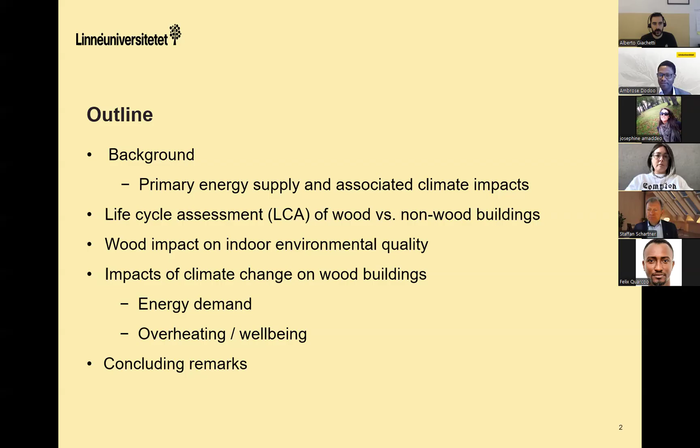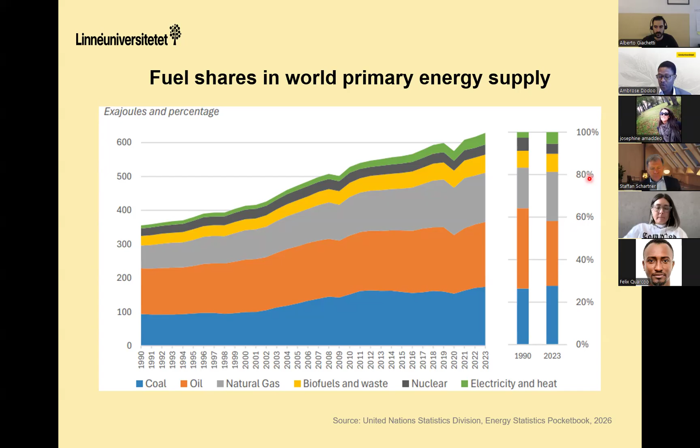But if you look at that percentage-wise, we see that still we are heavily dependent on fossil fuels. Globally, over 80% of all our primary energy supply is still coming from fossil fuels, despite all the effort we continue to make. And of course, we are making a lot of effort. So this tells us that we need to do more than what we are doing. This is because our use of fossil fuels is associated with carbon dioxide emissions. The fossil fuels are hydrocarbons. In other words, when we burn them, we get carbon emissions and we also get hydrogen coming into the atmosphere.

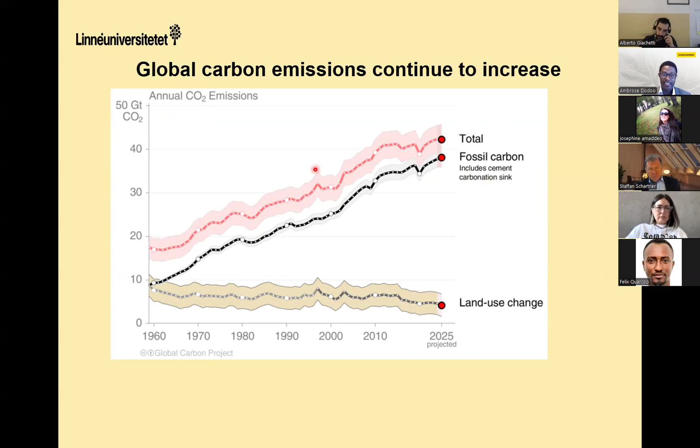And we see the evolution of the global carbon dioxide emissions over the years. And this is actually following our consumption of fossil fuel. So this is a reflection of our global energy and material system today, heavily dependent on fossil fuels. Over here, we also see the emissions coming from land use change. Of course, this is when we clear the forest or change the use of land, and then carbon is emitted. Together, we see that the emission is increasing, and we need to change the current trends.

And already we see that today, global emission has caused a temperature increase of about 1.4 degrees Celsius compared to the pre-industrial era. And if you look at the latest numbers, we saw that in the year 2025, for the first time, the temperature anomaly for a particular year was over 1.5 above the pre-industrial level. So we face a very huge challenge, especially when we have a global ambition to limit global warming to well below 2 degrees while looking at 1.5 as our target.

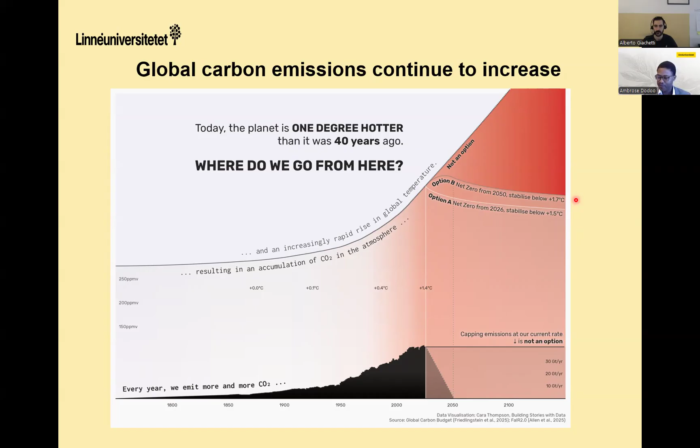So the current way we supply our energy, to power our production system, to produce our materials, needs to be rethought or needs to be changed. This demands fundamental transformation. And the IPCC 1.5 report gives a number of strategies we can implement to achieve this 1.5 if this is what we want to achieve according to the Paris Agreement.

The question is, how do we achieve this in the building sector? What are the solutions to achieve this kind of high ambitions? Of course, these are not only high ambitions, these are challenging, but this is something we must do. It's an imperative, it's a demand for us to do.

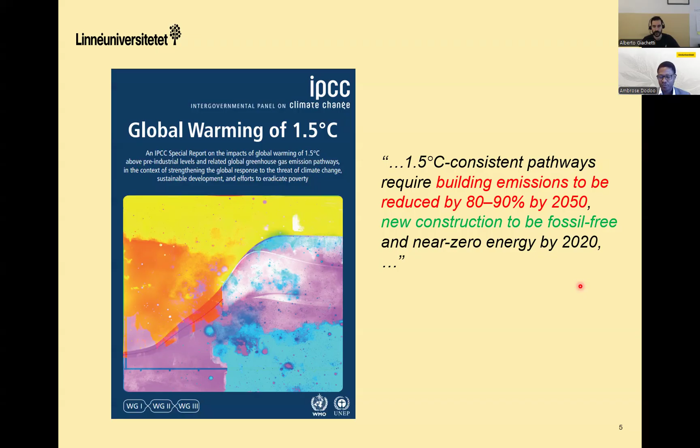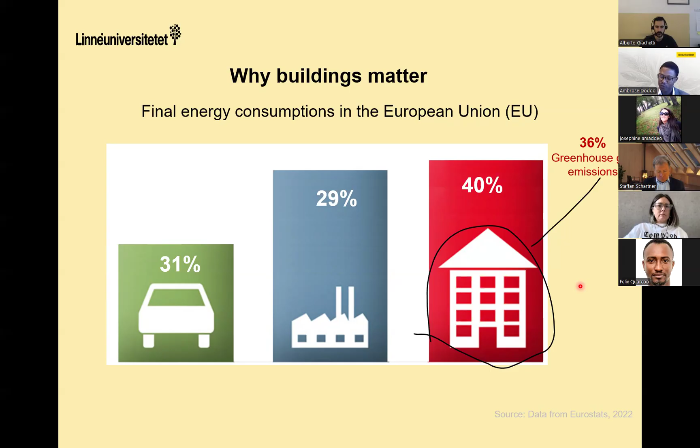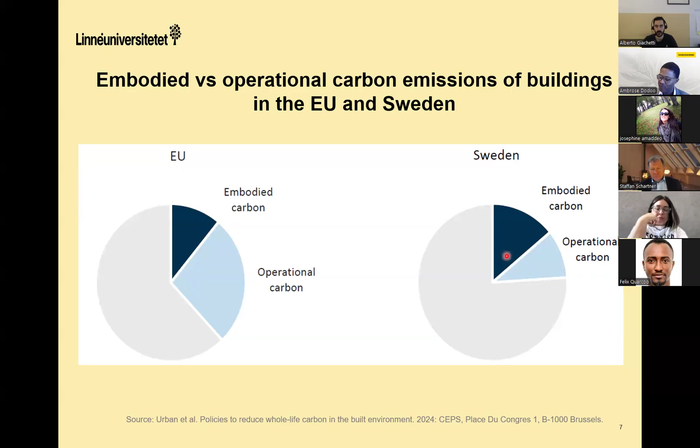So what has become dominant is the construction process, which depends on very fossil intensive materials like steel, concrete, and also, of course, the trucks to transport the materials, which are based on diesel and other things. And these are strategies we have to think about. How do we reduce the emission from the construction process? How do we also reduce the emission from the operational process of buildings?

And over here, life cycle thinking is very, very important, that we look at strategies which can reduce both the embodied carbon from the construction process and also the operational carbon from the operational process. And for the embodied carbon, for instance, we can look at better designs. How do we design more resource efficiently? And over here, we need, for instance, tools to help us to design more efficiently.

And one of the tools is life cycle analysis or life cycle assessment, which I'll talk about in the context of wood construction. We also need alternative materials. Today, most of our construction in Europe is heavily dependent on steel and concrete. And we have to explore the possibility of using other more renewable or low carbon materials, for instance, wood and clay and so on.

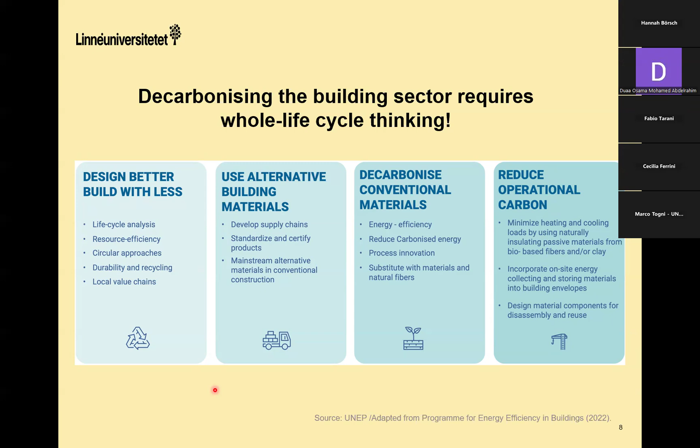And the conventional materials like steel and concrete, we also have to decarbonize them, because when you have wood buildings, we also have foundations which are typically made from concrete. When you have wood construction, most of the connections are based on steel. So even for wood buildings to get a low carbon footprint, other materials must improve. So we have to look at system-wide thinking, not just one material, but decarbonize all the materials and also minimize our need for heating and cooling.

And this cooling is very important in the context of climate change, which I'll show, because today the cooling demand in Europe is low, but under climate change conditions, we expect temperatures to rise and cooling demand might increase significantly. And this we have to also look at.

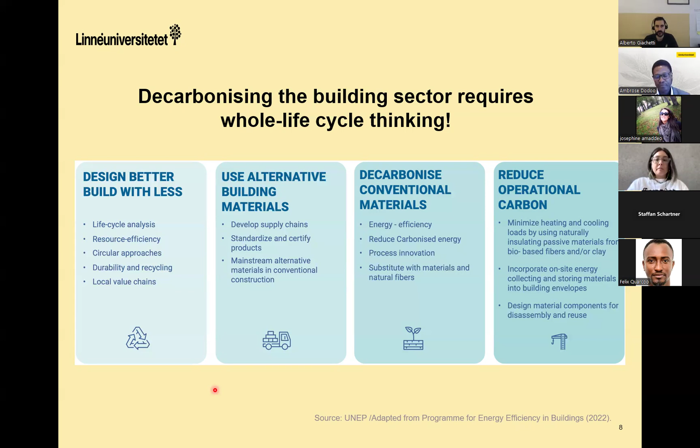So when we want to use life cycle analysis as a tool to optimize and design our buildings to reduce primary energy use and also to reduce emissions, we need to look at the entire chain, from extraction of materials to the end of life of the building, and even recycling and reusing the building. And commonly we do the life cycle analysis by following the European standard, EN 15978. This prescribes an approach to do life cycle analysis of buildings, because doing an LCA for a building is different from doing that for a product.

For instance, if we take a product, I have a bottle over here. This bottle might last a year or maybe less than a year. So we know the end of life. But buildings last longer. We have buildings which have stood 700 years, still standing. If you look at the average life of the building stock, it's between 80 years to 120 years worldwide. So these numbers vary.

So how do you, for instance, give a scenario about what is going to happen at the end of life of a building? It's a very complex issue, and this demands a more careful approach. That's why when we do life cycle analysis, we have to follow the standard. And when we talk about life cycle analysis of buildings, we distinguish between two main aspects.

We talk about the embodied carbon, which is for the construction process. And this is what we see, for instance, A1, A2, A3, A4, A5. And then we see B1 to B5. These are all embodied carbon, associated with the construction process or materials. And then we also have C1 to C4. And then we also have the operational carbon, that is from the use of the building, from heating, from ventilation.

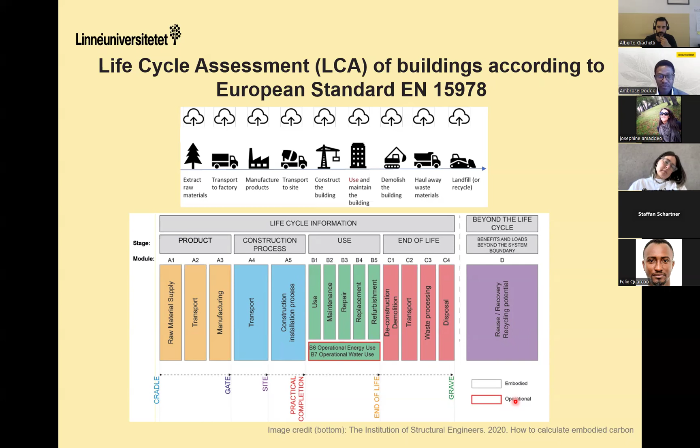And when you do an LCA, we need to show both of these, because sometimes you might end up optimizing one of them and then influencing the other, and in the end, you are not saving from the life cycle perspective. So a good LCA should optimize both the embodied and operational carbon. And I'll show the consequence of this when you look at wood buildings. So I just want to show a series of studies, and then I'll show what a synthesis of literature shows in the context of using wood for construction.

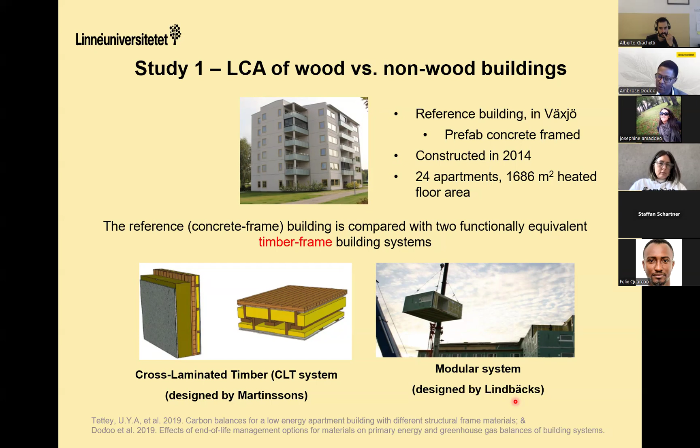So this is an LCA study we did a couple of years ago. Here we have a reference building, which is a precast concrete frame building, built in Sweden in the city of Växjö, where I sit today. And here we engaged construction companies which are building with wood to design this same building with a wood building system. They took the same floor plan, the same walls, and then they designed these buildings to carry the same load and to give the same heating demand. So the buildings are designed to be functionally equivalent or thermally comparable.

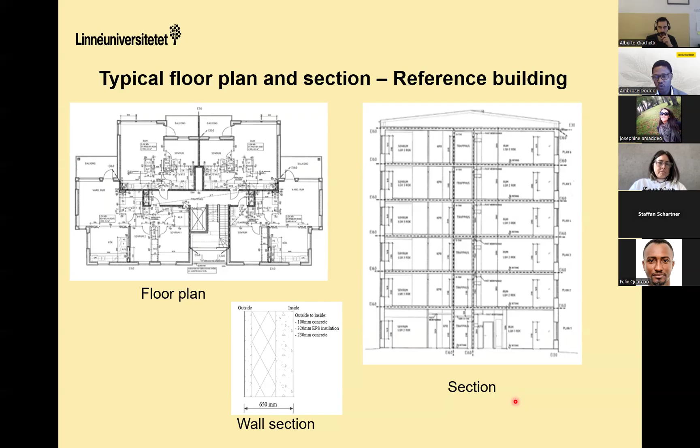So they can take the same load and they give the same heating performance. And then we do an LCA to compare where this building stands in terms of resource use and in terms of carbon dioxide emission. So this is the original design of the building, which is built today.

And then this is when the building is designed with cross-laminated timber, which is a form of massive timber over here. And then we also have a modular timber where we have timber volumetric elements or light timber volume elements, which are also assembled on site. So we have different wood construction. So this is a light timber wood construction in the form of a volume element. And this is a massive panelized wood construction based on cross-laminated timber. And then this is a concrete.

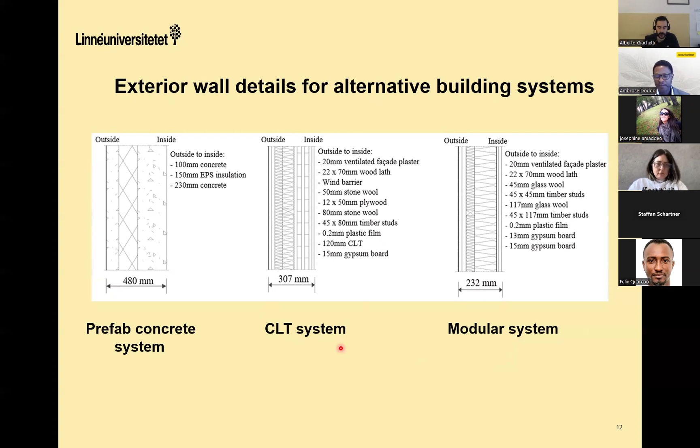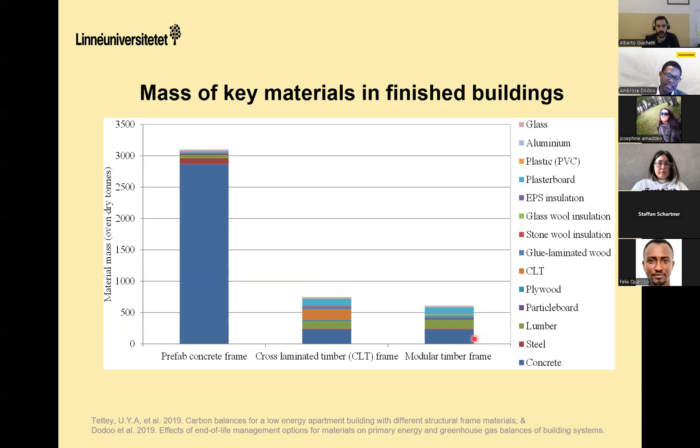And then based on this mass of materials, we calculate the energy to extract, to transport, and to process these materials. And we can get the primary energy use and also the emissions. And over here, I want to show a few numbers about the primary energy use. So this is the energy to extract, to transport, and to process the building, and also to construct it on site. So this is the primary energy use, which reflects the use of natural resources.

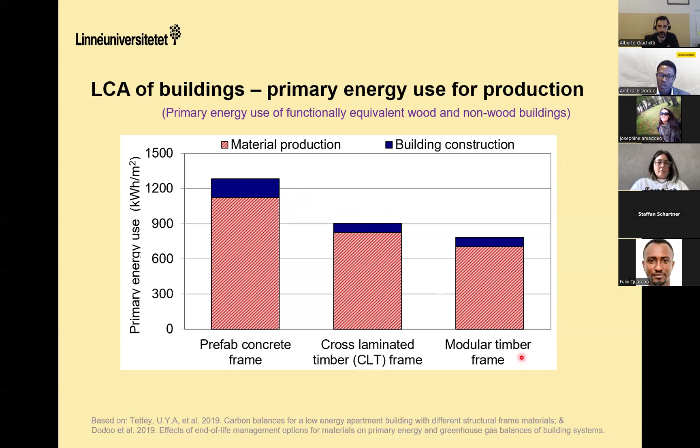So we can see that the concrete frame building requires much more primary energy use than the wood building. As you can see, if you compare this to this, it's about 1/3 more for the concrete building compared to the cross-laminated timber building. And it is lower for the modular timber building, as we see over here.

Now we can also look at the embodied carbon. That is the embodied carbon just for the production stage. So over here I talk about A1 to A5. And we have the material production, that is to extract the materials, to process them, to transport, and then to build the building. And then we also have what we call the cement reaction, which is coming from calcination of cement, and then also carbonation.

When you talk about cement production, I just want to mention one thing, that the emission from cement production is not only from fossil fuels, it also comes from a chemical reaction called calcination, when the cement is made from limestone, because this limestone is heated, and then it breaks down into calcium oxide or clinker and carbon dioxide. So we get process-related emission. And sometimes we want to show this differently, because the material production emissions come from fossil fuels, but for the cement reaction you have a chemical process producing this emission. And of course, you have more for the concrete building because you have more concrete.

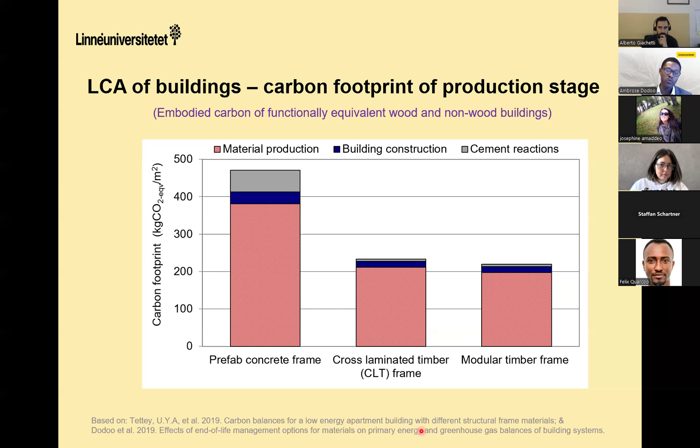But what we saw in this life cycle analysis is that when you build with wood-based construction systems compared to concrete, the emission is reduced about 47%. So building with wood gives lower carbon dioxide emission. And these are studies we have done. And I want to put this in the context of the literature, because other people have done studies. Have they come to similar conclusions? And I will say yes, this is an example of a study which is also peer-reviewed. Our studies are also peer-reviewed.

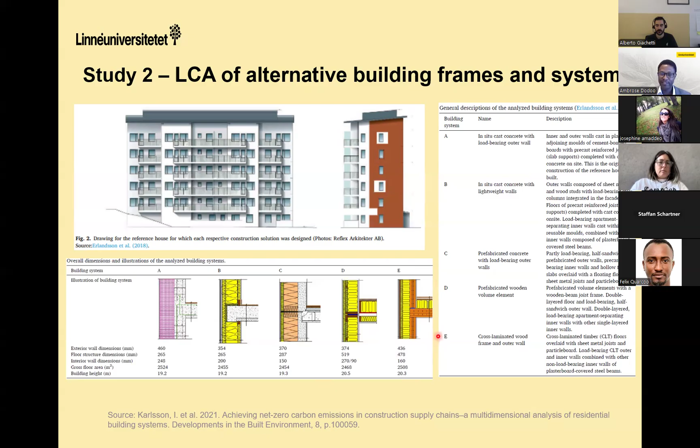And over here, a concrete building as a reference building is compared to different wood construction systems. And the buildings are shown over here. So A is a concrete building. And then we also have a light concrete building mixed together with wooden elements. And then we also have the cross-laminated timber building, that is a massive timber building. And I want to focus on the conclusions of this study.

Over here, we can see these D and E, which are the wood solutions, right? And then these are the concrete building systems. If you look at the emission difference between these, it's about 1/3 again. So we see about 33% reduction in emission when you use the wood-based system instead of the concrete building system, which are the A and B, as we see over here.

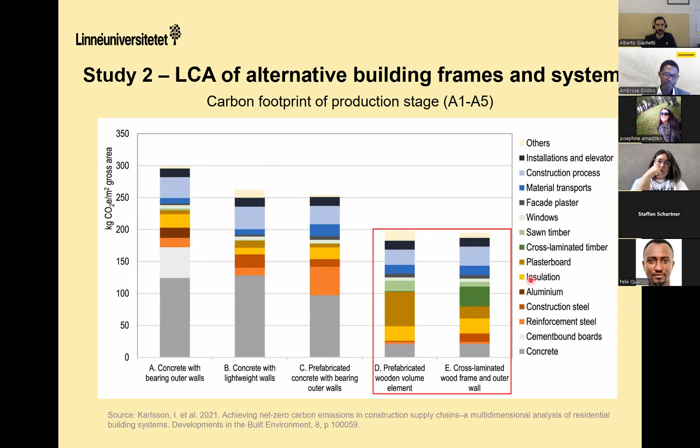So we also see a similar trend of results that building with wood results in lesser emission than building with non-wood materials. So these are wood and concrete I've shown so far. What about steel? Steel is also an alternative material. This is a study which was done in the UK a few years ago.

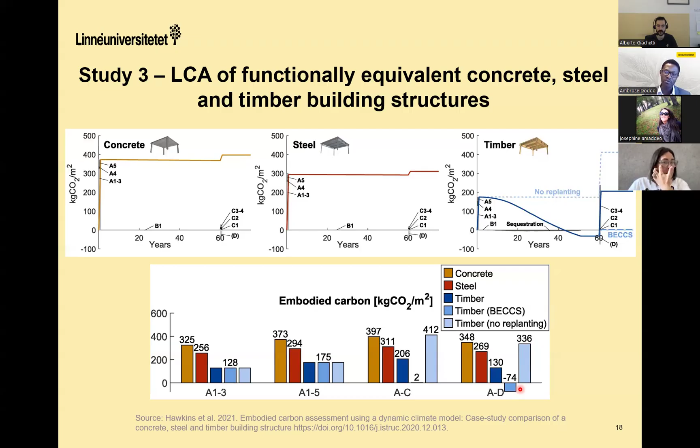Now I also want to show a study which focuses somewhat on the operation phase. So far I've just shown mostly A1 to A5, and the end of life, or the embodied carbon, but I have not shown the impact on the operational carbon. What does it mean to build with wood instead of concrete when you look at operational carbon? Because we know that concrete has higher mass, thermal capacity, or more thermal mass than the wood building.

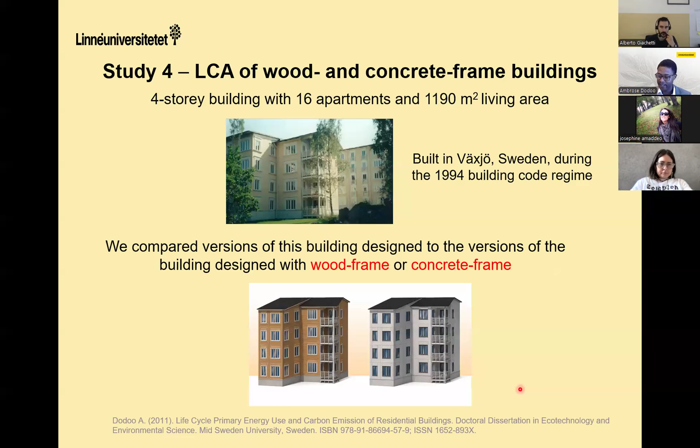So here the focus is on the primary energy use - the energy to extract, to process, then to construct the building, and then to heat it, and the end of life. We look at the entire energy chain, or resource chain, to see does it really matter when we build with concrete and wood, if we also consider the operational phase, or the thermal mass effect of concrete. This also came from a peer-reviewed study.

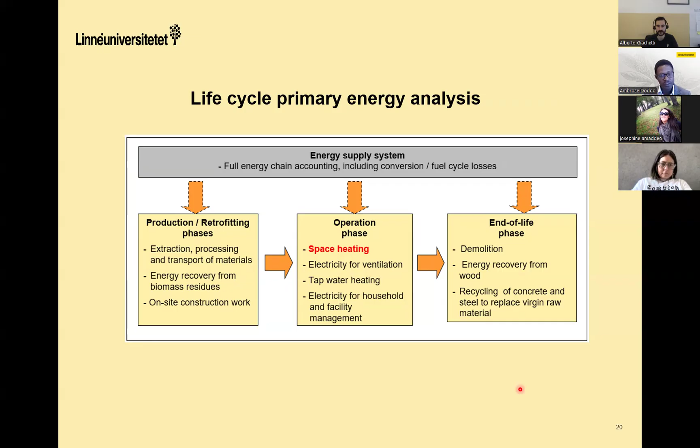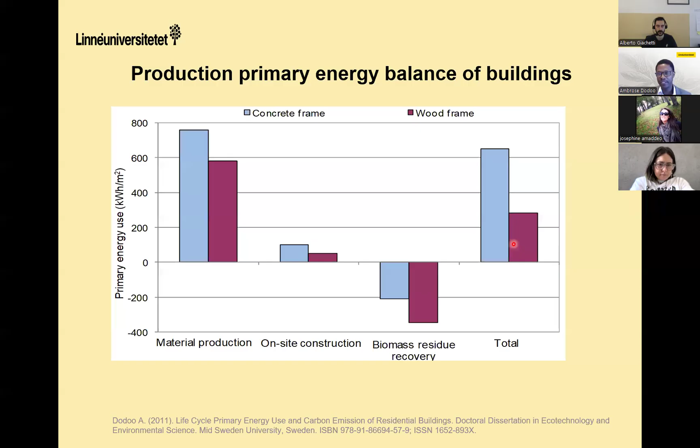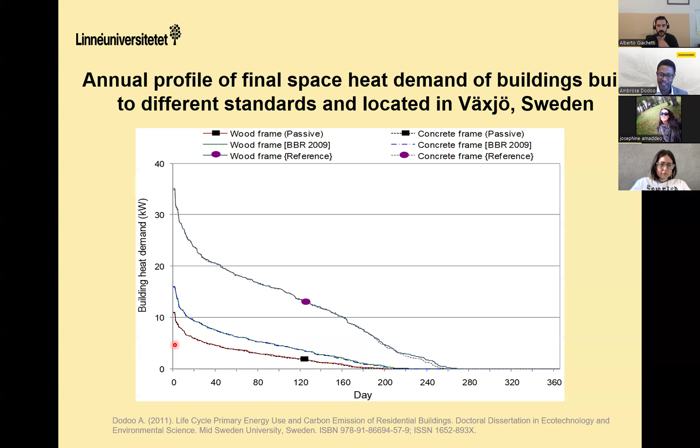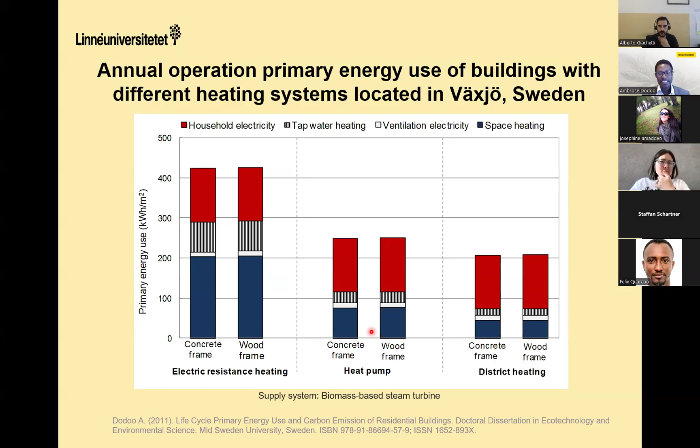If all the buildings are designed to be thermally comparable, or built to the same standard, the use phase is about the same for them if the buildings are well insulated. This is the end of life of the building too, which I won't go into much.

What I want to present now is a synthesis: what does the literature show? I've shown studies we've done, and also studies from other researchers. We also tried to look at CLT, which is a modern way of building medium to high-rise wood buildings, and compare it to other building systems from the literature.

So here we look at different studies, over 30 studies which have compared the life cycle impacts of wood, that is CLT based on cross-laminated timber, to steel and to concrete. We compared this from the literature.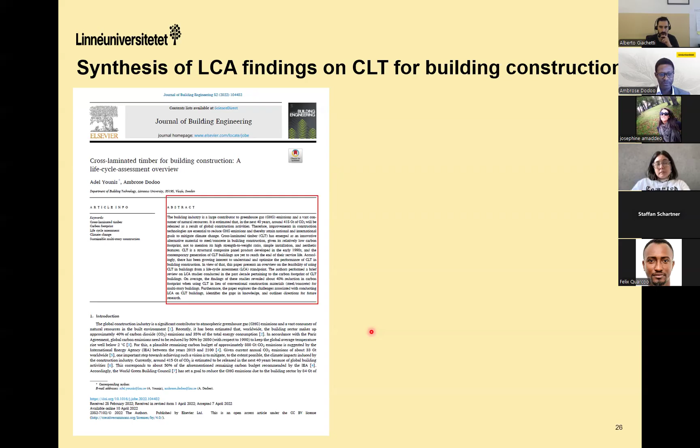The studies we compare must have these two: they compare CLT and then concrete or steel. I want to focus a bit on the abstract, what is written in the abstract. This paper is available online as well.

This is a key finding from this study: on average, we found about a 40% reduction in carbon footprint when using cross-laminated timber, a massive form of wood, compared to when steel or concrete is used for the same multi-story building. This is what we concluded from the literature.

So building with wood gives climate benefit when viewed from a life cycle perspective. And when you build with wood and build with concrete, and the buildings are designed to be thermally equivalent, there is no difference in the heating demand during the operation stage.

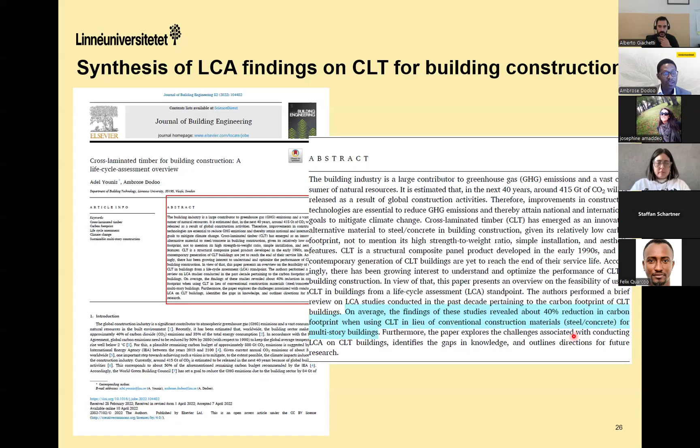One of the things I've also tried to look at in this lecture is the indoor environmental quality. I draw on the literature, a study which synthesizes many studies comparing wood used in construction, mostly in the finishing of buildings, or exposed wood in construction. This is a very extensive study covering about 140 peer-reviewed articles and also PhD dissertations and books.

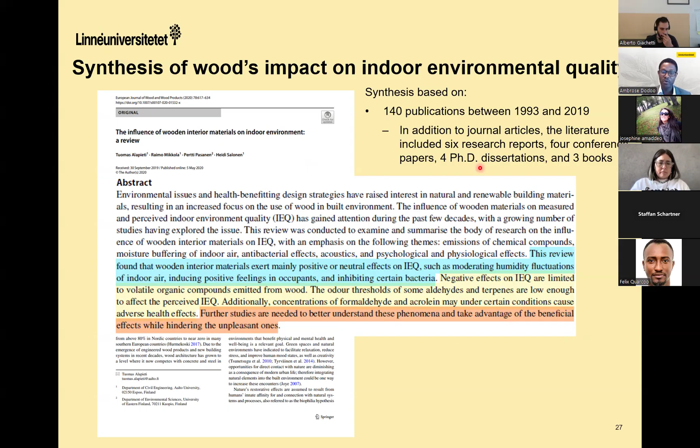I want to draw on the key conclusions: when you build with wood, you have a positive or neutral effect on indoor environmental quality mostly - that is humidity, indoor air, and positive feeling from occupants. Of course, there are also other issues like formaldehyde and other emissions, especially when you have glued wood or painted wood which is exposed indoors. But mostly the studies show positive or neutral effect of wood use in the indoor environment.

And of course, the study points to the need for more studies in this direction again.

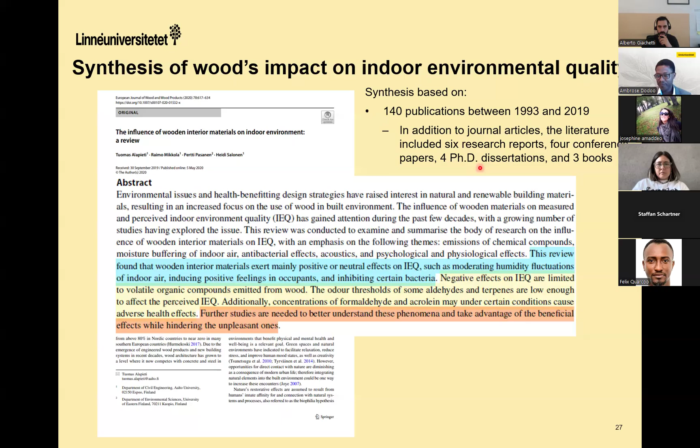I also want to discuss how climate change would affect energy use and thermal comfort in modern timber building systems. So far, I have discussed extensively how to decarbonize the building sector, which is very important for us to reach 1.5 or well below 2 degrees. We know that most emissions come from the building sector. We have buildings affecting the climate or destabilizing the global climate system, and we know that climate change is also going to affect buildings.

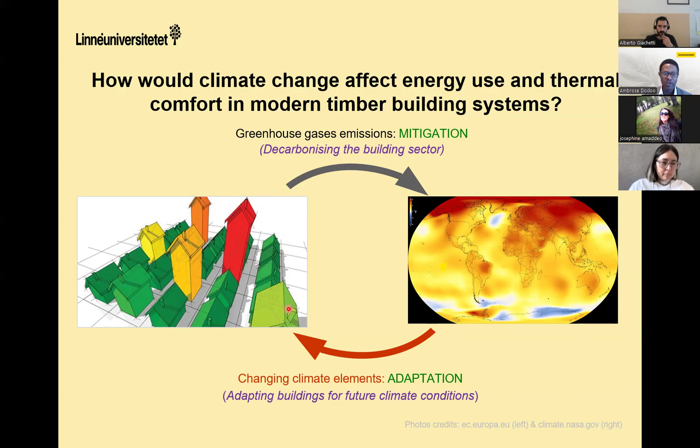So we need to mitigate climate change by adopting solutions which reduce greenhouse gas emissions, like wood as a solution. But at the same time, temperatures are rising, and climate elements like humidity, rainfall, and snow are changing, which will affect building performance. So we also have to adapt our buildings to future climate change conditions. We have looked at this question in the context of wood buildings: how would climate change affect energy use and indoor environmental quality, especially thermal comfort, in modern timber buildings?

So here we are not directly comparing the buildings, but we want to illustrate the effect of climate change on the performance of wood buildings - how climate change affects building performance.

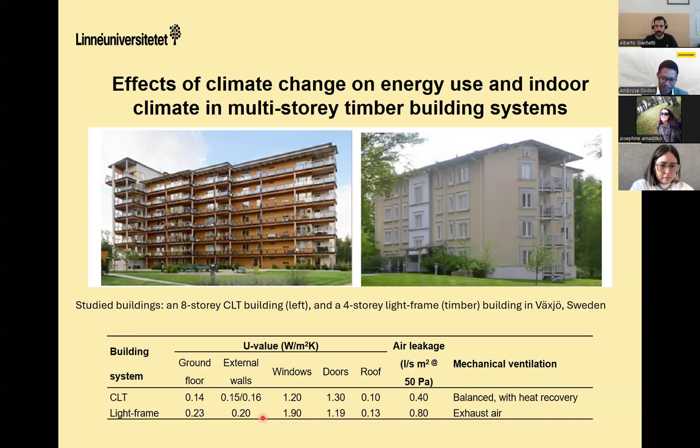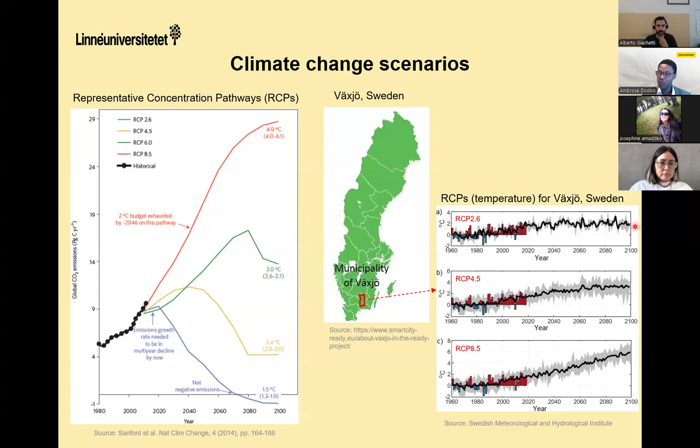We have used this to do energy simulation of the buildings. We used the 1996 to 2005 climate as our reference or baseline, and then a methodology called morphing to stretch the historical data to produce how the climate will be in the future. Based on that, we did simulations to calculate how the indoor climate will be in terms of temperatures and also the energy demand of the building.

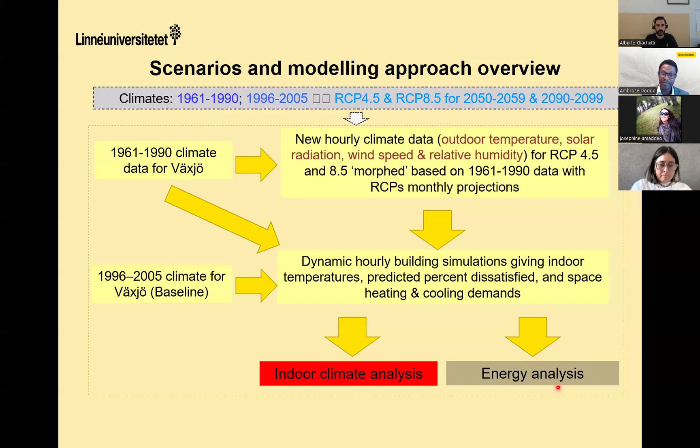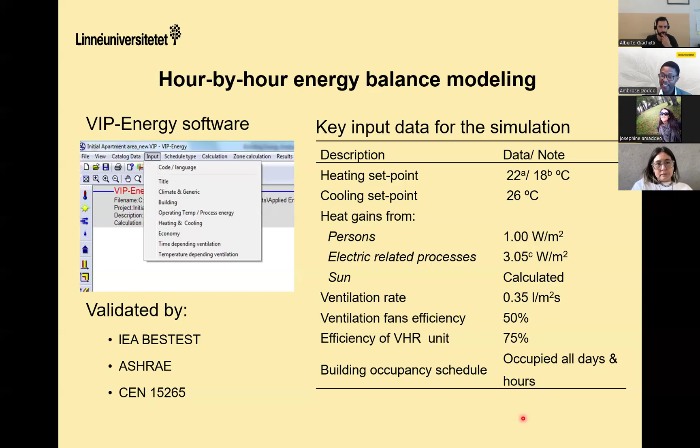And then we also have the cooling set point, the point at which we begin to cool. And this is also based on the regulations in Sweden, which says that overheating starts when temperature exceeds 26 degrees. We want to avoid overheating. So this is the cooling set point we have set over here. Of course, in some countries, the cooling set point might be different, but here we have tried to use Swedish data again. And we have assumed that the building is occupied all year round because it's a multi-story building. Some people might go to work, but some people are still in the building. And this building has a central heating system, which is district heating.

So over here, what we want to look at is the space cooling and the space heating load. And I should say that typically in Sweden, we don't have space cooling systems in residential buildings because the cooling demand is very low. Normally, we induce cooling by increasing the airing or the ventilation rate in the buildings or opening our windows. But we have heating systems. Of course, Sweden is a very cold place. So we look at how climate change is going to affect the balance between space heating and space cooling.

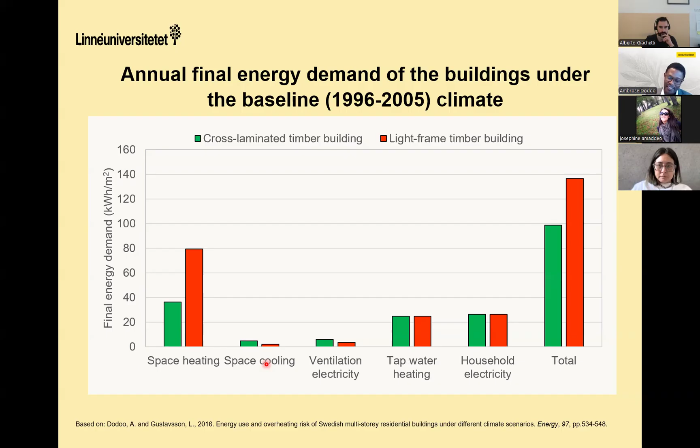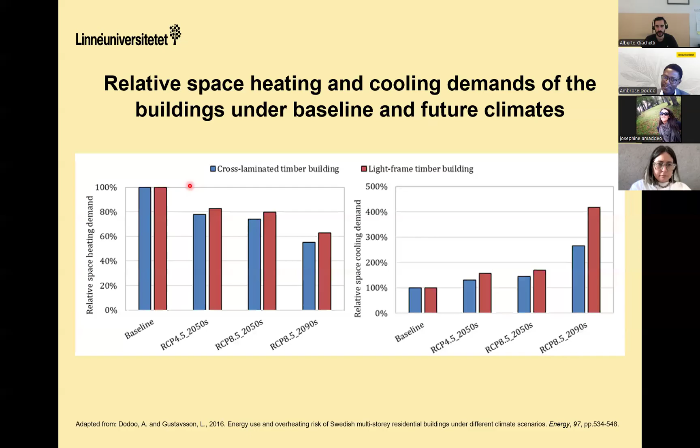And then we go even more. If you look at the worst form of climate change, we are going to about 400% increase, or a factor of 4, as we can see over here. So the trend we see is that if you look at wood buildings, not only wood buildings, every building, you see a similar trend: climate change is going to cause the heating demand of buildings to decrease, but cooling demand to increase. So even though wood is a very good material to build with, we should also think about how we design our wood buildings to reduce the need for cooling, especially under climate change scenarios.

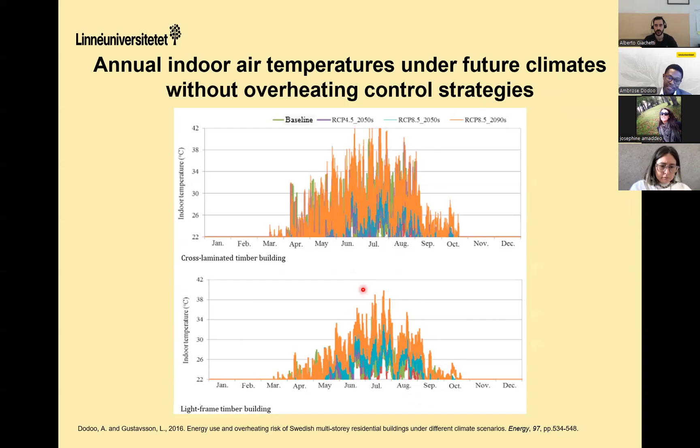What we are concerned about over here is to look at the risk of overheating, which is very important for well-being, because when the building is overheated, that affects our concentration. That is not good for children and elderly, who are very sensitive to this kind of temperature. So this is a well-being issue. So as I said, in Sweden, when the temperature exceeds 26 degrees, we say that the building is overheated according to our criteria in Sweden.

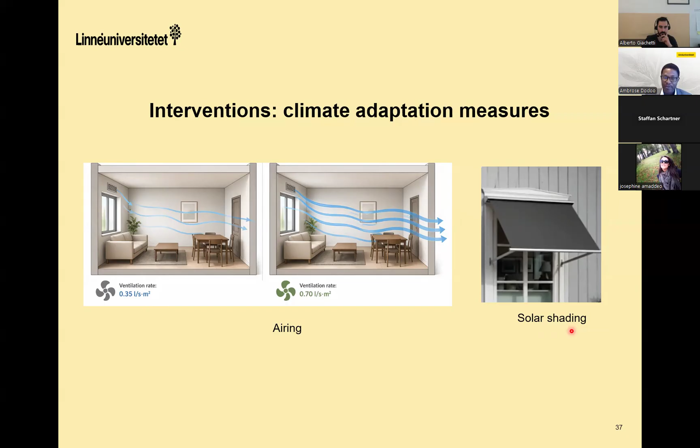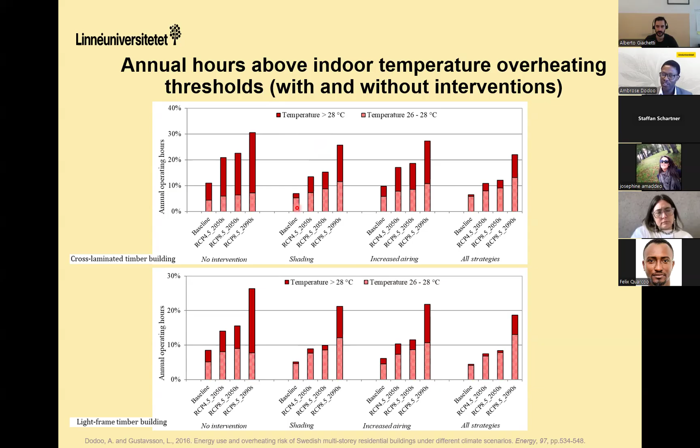And what this is telling us is that when you design timber buildings, we should also look at strategies to prevent overheating of these buildings, and more especially passive strategies. This should be incorporated in the building already, because these have an effect on the cooling load, which I will show shortly for the buildings. Now, this is a building with interventions, once again. So these are when we do interventions.

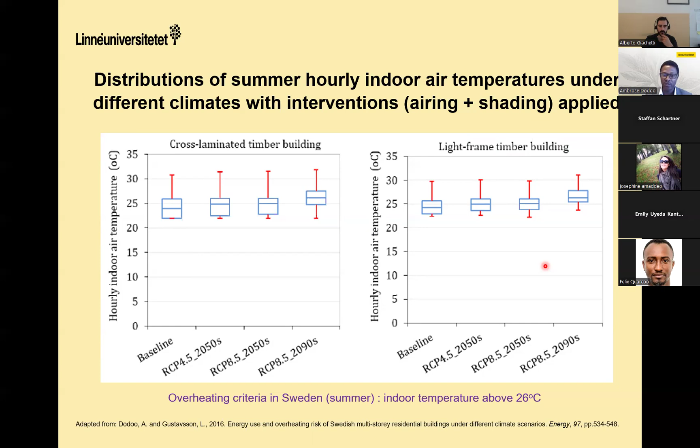So this is a baseline when we have the initial, that is no intervention in the building. And then when we have the intervention, when you combine airing and then shading, we can see that we reduce the cooling load quite a lot in the building again. And this is what is interesting over here. This is the worst form of climate change.

That's the RCP 8.5. If we combine these intervention measures, you can see that we reduce the cooling load quite a lot to the baseline without intervention. So this is telling us that even under the worst form of climate change, of course, which we should try to prevent, we still need measures to reduce our cooling load. And this will take us to the same values we have for the baseline without intervention.

Again over here, we see a similar trend over here. Of course, this one over here, even though we reduce that, we don't come to the level of the baseline as we see over here. So what I want to point out over here is that it is resource efficient and carbon efficient to build with wood as a construction material. But we need to adapt strategies to reduce overheating in wood buildings, not only wood buildings, but all buildings.

Because we might end up building with wood, saving resources, saving emissions. But if we don't do strategies to reduce cooling load, then we are going to increase our cooling demand in these buildings. And then the resource gain we get is going to be offset by the increase in cooling load, because our cooling load is mostly delivered by electricity today.

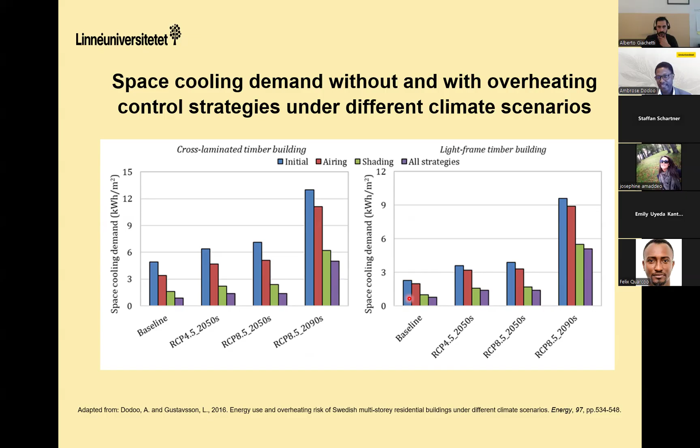So I just want to conclude this lecture by saying that wood-based materials reduce embodied carbon and support decarbonization of the building sector. And climate change shifts the energy demand of buildings towards more cooling in the Swedish context, but not only the Swedish context, the Nordic and many European countries as well. And increasing indoor temperatures in the buildings leads to discomfort, and this affects well-being. And this is something we should expect under future climate, unless we do strategies to reduce our cooling load or

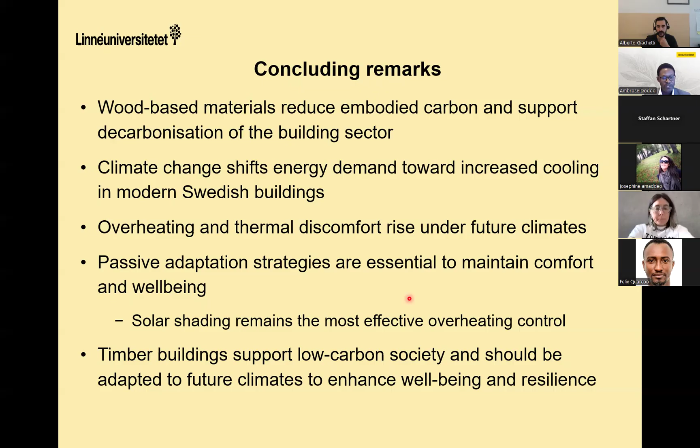indoor temperature. And over here, we have passive strategies like solar shading or airing, which can cut the overheating of our buildings. And this we should try to incorporate in wood buildings, in all buildings, when we design them today. And we can also do the same thing to existing buildings. So in conclusion, I would say that timber buildings support a low carbon society and should be adapted to future climates to enhance well-being and resilience.

And I also want to say something from the United Nations Environment Programme, from the unit called the International Resource Panel, where I'm also a member, that we need to bend the trend. Emissions continue to increase. We need to change the trend, and we can bend this by adopting the solutions we have. We have solutions like building with wood as a material to reduce carbon emissions. And we need to adopt these materials, implement them to create a healthier planet.